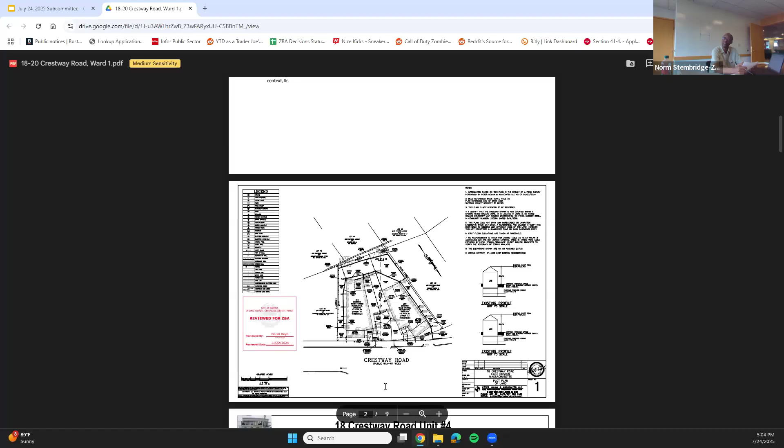Thank you, Madam Chair. For the hearing scheduled for 5 p.m. today, the first case we have is case BOA 1674561 with the address of 18 to 20 Crestway Road. If the applicant and or their representative are present, will they please explain to the board?

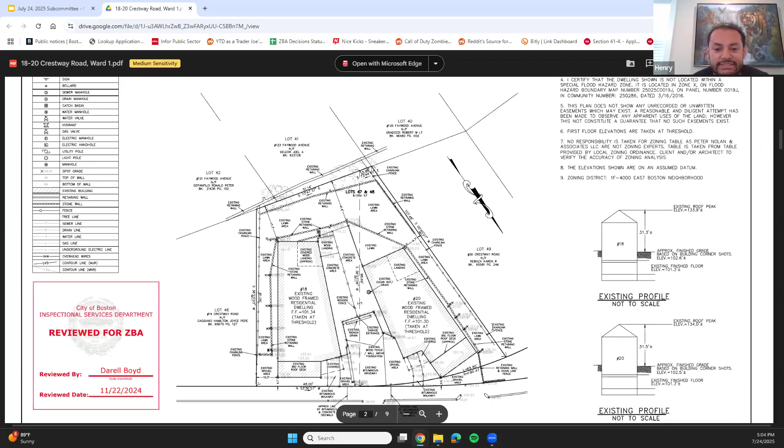Hi all, can you guys hear me okay? Yes, sir. Oh, thank you. So yes, my name is Henry Sanchez. This is my proposal. I currently live at 18-20 Crestway Road, Unit 4.

So it's the left-hand sided building that you see on the screen here. It's a two-building condominium homeowners association. There's 2 units in my building, again, the 18 side, 3 units on the number 20 side. And really our project is just looking to get more outdoor space. There really is no common area that's accessible or belongs to us. The middle kind of area that you see between the 2 buildings is a courtyard area that is exclusive use for units 2 and units 1, which are the lower level units on each of the buildings.

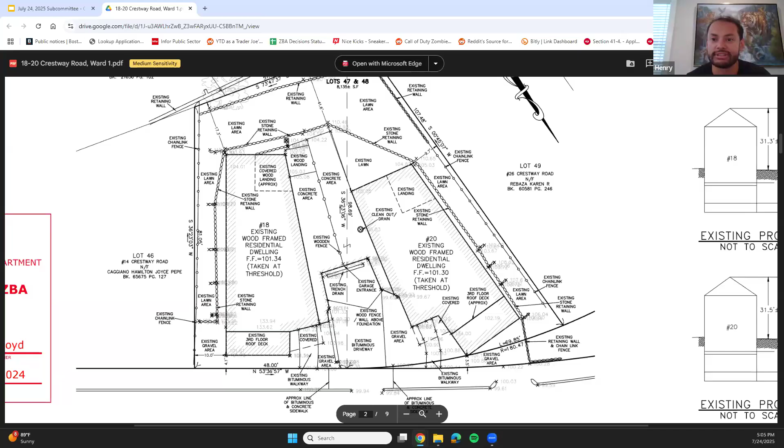Our unit is on the 2nd and 3rd floor of the left-hand building, and like I said, there's no common area. There's no kind of backyard. It's just kind of a high ground existing retaining wall with some trees in the back. So we're just looking to get a little bit more sunlight, enjoy the outdoor space in the couple of months that we do have here in the Northeast. And again, it's just my wife, myself, and my son here that live with us.

Not a lot of people are going to be using it up there. At the moment, the design we're going for is to follow the overall shape of the building, so not exactly square, but it's about 800 square feet. The plan would be to have a see-through pergola up there just to let a little bit of sunlight through, not looking to block sunlight for any of the neighbors or anybody else around. But I think that's it in a nutshell.

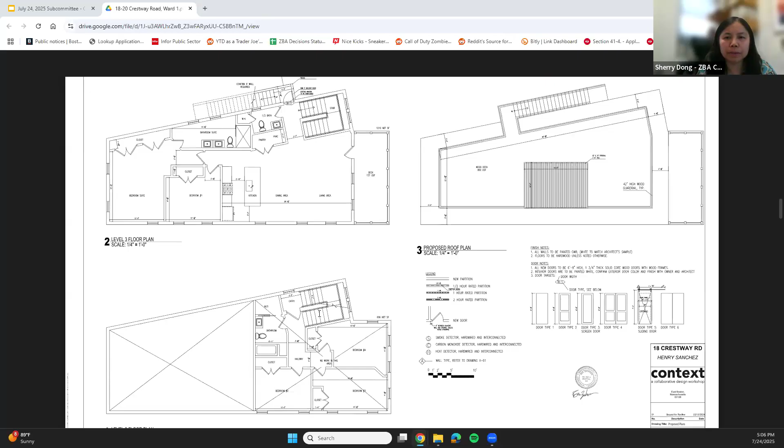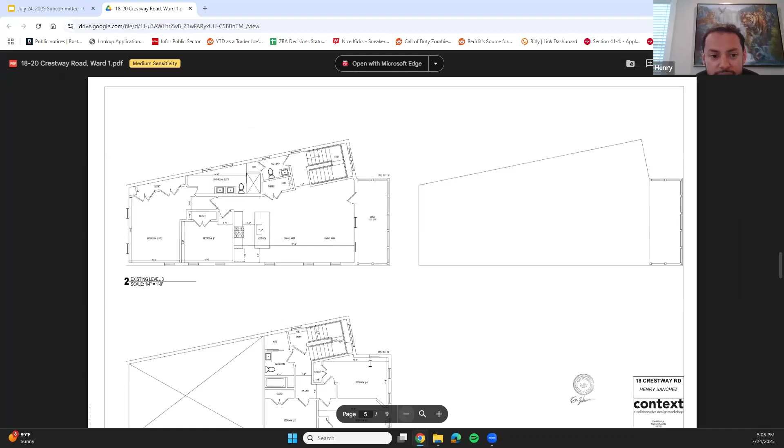Can you confirm how far the deck is set back on the front side? Yeah, I believe, and I'll invite Eric who helped me with the plans, but I think it's about 10 feet, if we scroll up a page. To the prior page, maybe one more. Yeah, this one here, on the top right. So it's about, I can't see that exactly. Is it maybe...

So it's about 7.5 feet from the exterior of the building. However, the square rectangle that you see on the right is the front balcony that we have, and that's where the building exterior runs to. Are there questions from the board?

No, there's no questions. It's good that you asked regarding the setback, because I see that the Boston Planning is recommending that the deck be set back at least 5 feet from the edge. Do you see that being a problem? And maybe this is more to your architect, Eric.

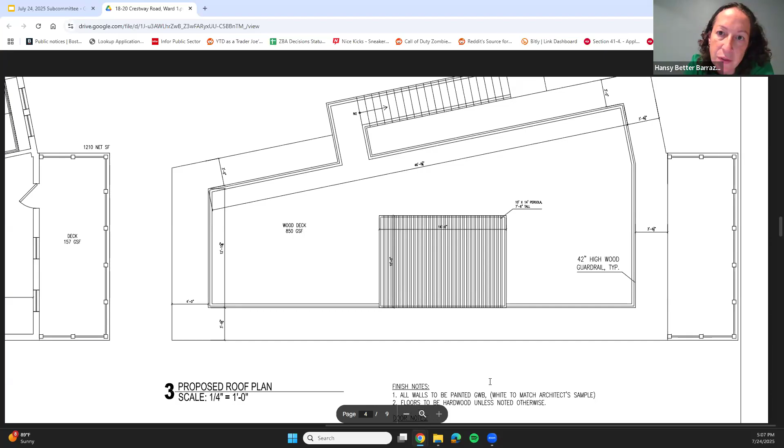Thank you, Hansy. This is Eric Dackerson, architect for the project. No, I don't think that would be an issue at all, being set back 5 feet from the edges of the roof, except for in the area right around the staircase.

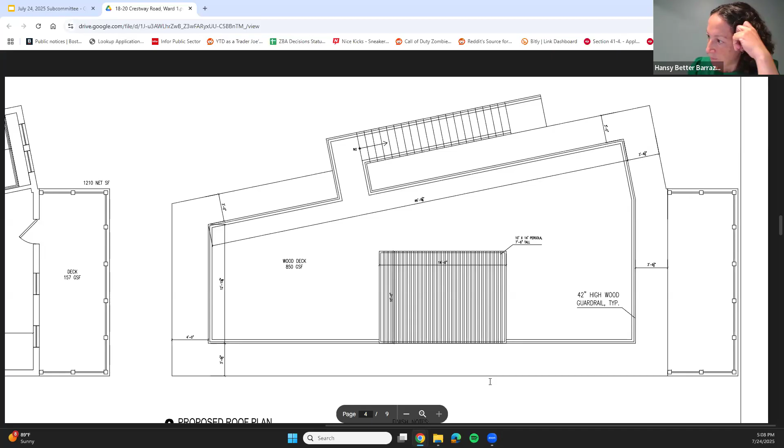Okay, great. And then they're also recommending that the pergola be removed. Do you see an issue with that as well? No, that'll be fine. We could look at some alternative kind of shape, maybe an umbrella, but no permanent structure. We can think that over. Yeah, that's usually, and as you know...

Typically, they're recommending that you access the roof deck through an internal stair versus an exterior one. And I do see that there is a possibility to have an internal stair for private access, and you can either do a roof hatch or an access like a headhouse access.

Yeah, we definitely contemplated that initially. The challenge is the level below — the stair would either eat up a big significant portion of the living room or the kitchen. So we were hoping to extend up from the stair, as is shown on the exterior. But I guess the answer is up to the owner; that is the reason we chose to try and do a stair along the side of the building instead.

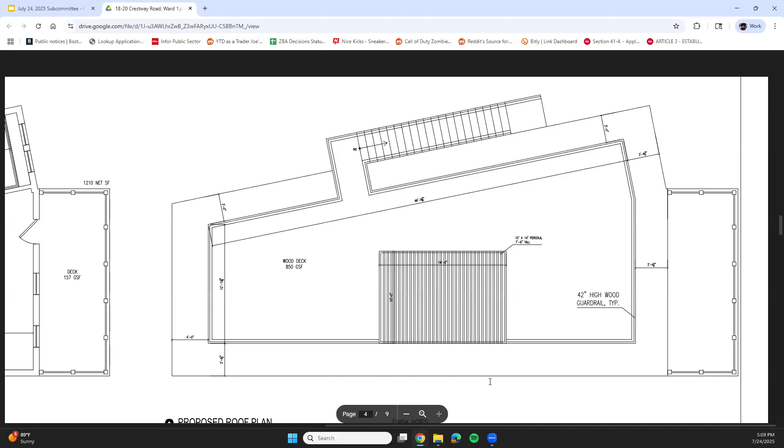It looks like you have a vertical core. It looks like you can tie into that potentially, and maybe you will need to move the location of the roof deck for that to work, so it doesn't eat up half of your living space. But I think these things can be worked out. So, Madam Chair, I don't have any further questions or clarifications.

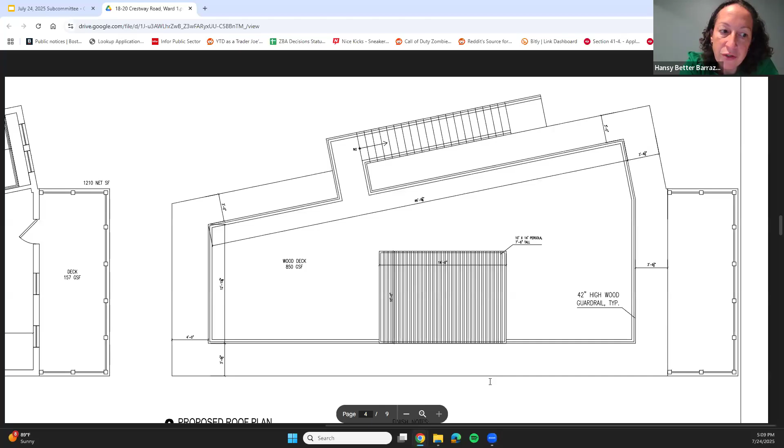Sounds good. With that, may I have public testimony? We don't have any hands raised right now.

Okay, Madam Chair, members of the board, Connor Newman with the Mayor's Office of Neighborhood Services. At this time, the Mayor's Office can defer to the judgment of this board. ONS ran an abutters meeting on April 9th, a long time ago. The applicant was able to answer questions that residents had. They went on to connect with the Orient Heights Civic Association. Presently, we're unaware of any concerns at this time. With that, we'll defer to the board.

Thank you. With that, may I have a motion? Yes, Madam Chair, I'd like to put forward a motion of approval with 3 provisos: one, that the pergola be removed; second, that the roof deck be set back 5 feet from the edge; and lastly, that the architect works with BPD in the design of an internal stair to provide access either through a roof hatch or a head house.

Is there a second? Second. Mr. Stenbridge, yes. Ms. Better Barraza, yes. Chair votes yes, the motion carries. Good luck, sir. Thank you.

Next, we have case BOA 1728524 with the address of 389 Maverick Street. If the applicant and/or their representative are present, would they please explain to the board?

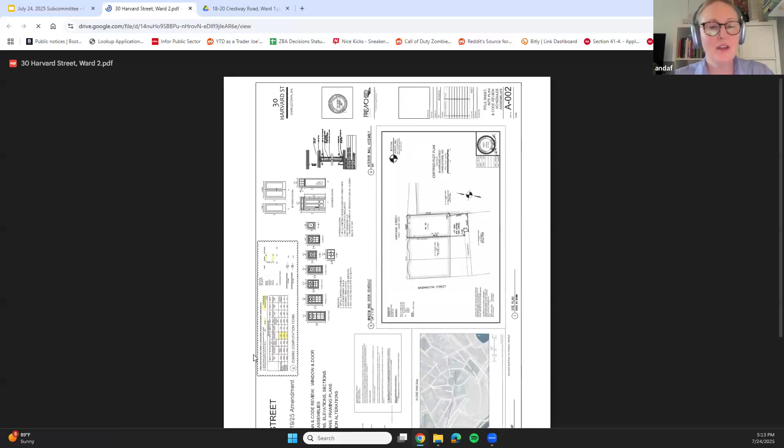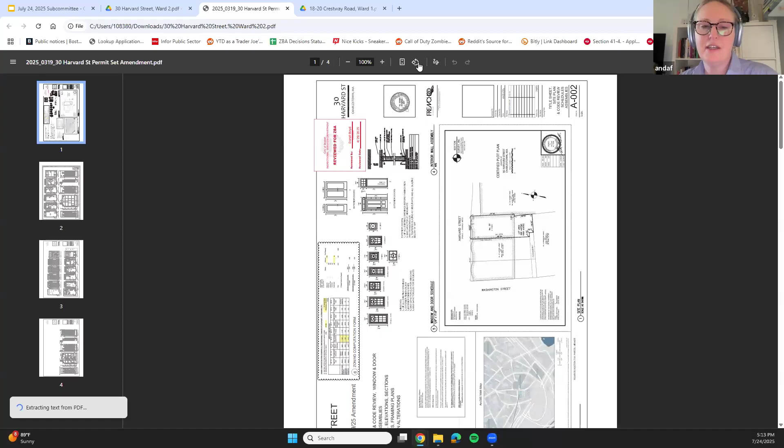Yes, hello. My name is Anna French from French 2D Architects in Charlestown. This is a 3.5-story brick row house in Charlestown on Harvard Street. The project is a single family home currently being renovated. The variances we're seeking are around the extension of a dormer, widening a dormer at the rear, and using the basement as living space.

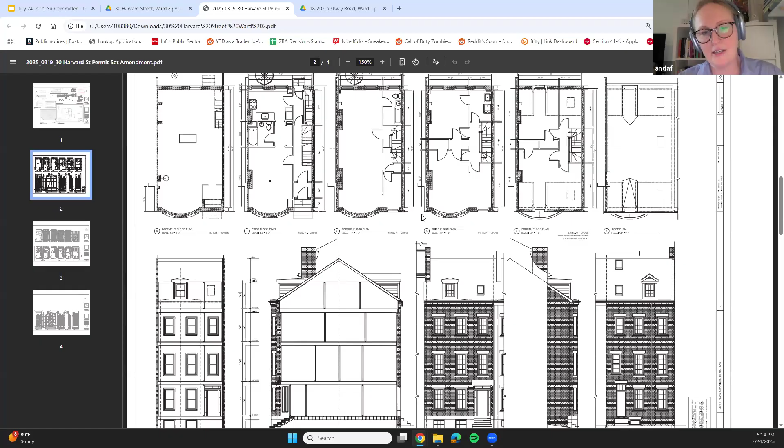We met previously with both Alexa Pinard of the Planning Department and Shelley Blanchard of the Landmarks Commission. Both saw no problem with the addition of the dormer. It does not sit on a public way. What you're seeing here is the existing condition, with the front elevation on the left and the rear elevation on the right. If you go to the next slide, you'll see the proposed change.

There we go. You'll see that the front has not changed, that it's the restoring of the exact dormer that already exists. At the rear, we've taken the existing dormer and repeated it three times to create that larger dormer, but set back the form between so that it is not one large shed, but instead varied. The neighbors have been very excited about this. If there are any other questions I can answer, we did have some supplemental photographs if that helps.

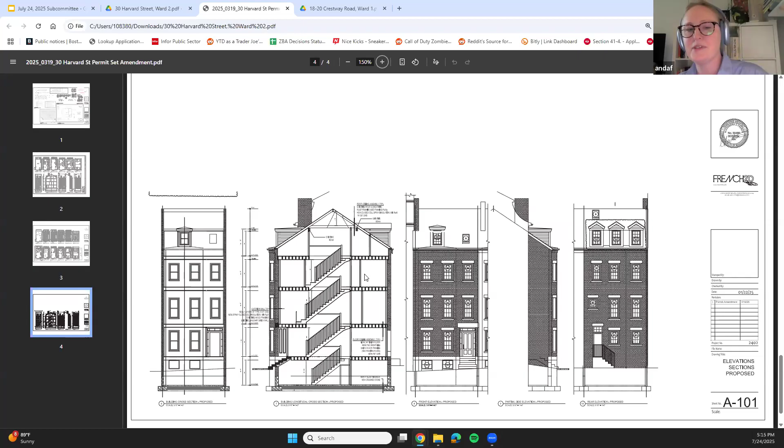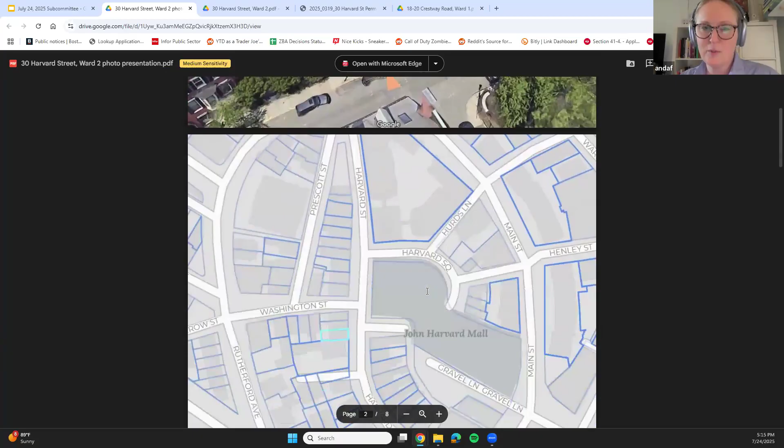The general condition here on Harvard Street is that all of the front-facing houses have maintained their historic character and existing dormers. If you look at the images showing the rear, this is very characteristic of many of the houses in the row, where you'll see this kind of shift happening. In the next slide or two, we outline it, and you can see the variation that has happened over time on slides 6 and 7.

Great. Are there questions from the board? Yes, if you can just go to the slide showing the front view where you can see the front windows. Of the frontal view, yeah, that one. This one, perfect, right here.

Can you just describe what use you're doing in the basement? Are you going to do a habitable room, or is it just storage? What's the function of the basement use? Yes, of course. It's essentially a family room and a laundry room.

I'm picking up feedback. It's the addition of a family room, a laundry room, and a bathroom. Okay, so it's not going to be a habitable bedroom? No, no, no bedroom, absolutely not.

I don't have any further questions. I was just kind of concerned with the window locations and not having an egress, but it's fine. No further questions. Thank you.

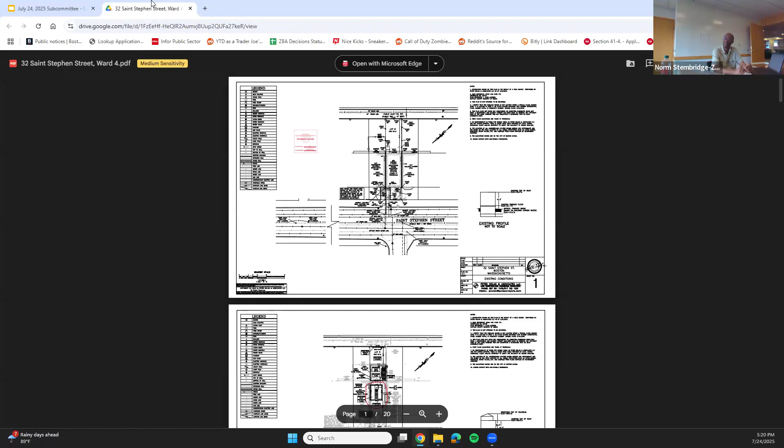Thank you very much, Madam Chair, members of the board. Cameron Merrill on behalf of Kyle Holden and David Bedrin, the applicants. What you have here is a head house not connected to a roof deck. This is for access from this renovated brownstone. It's been about a year and a half or so of renovations, and this is the final step. They need safe and easy access to get to the roof, and this was the proposal they thought would be appropriate for this location. It will be complemented by a skylight in the roof as well, which will brighten up the top floor of their home and provide access to the roof, which currently does not have interior access as needed.

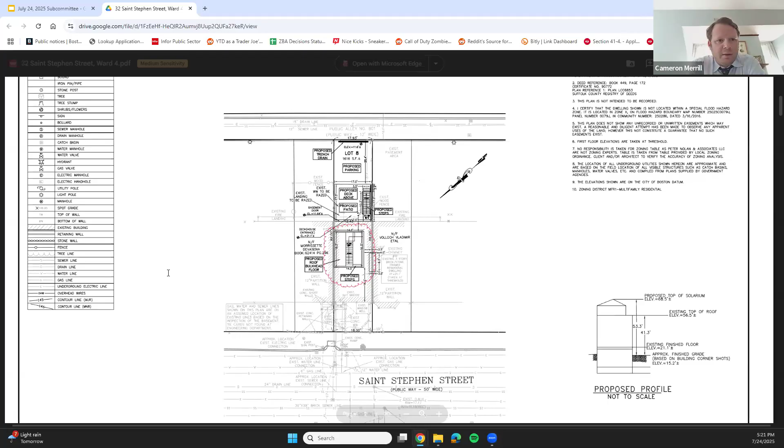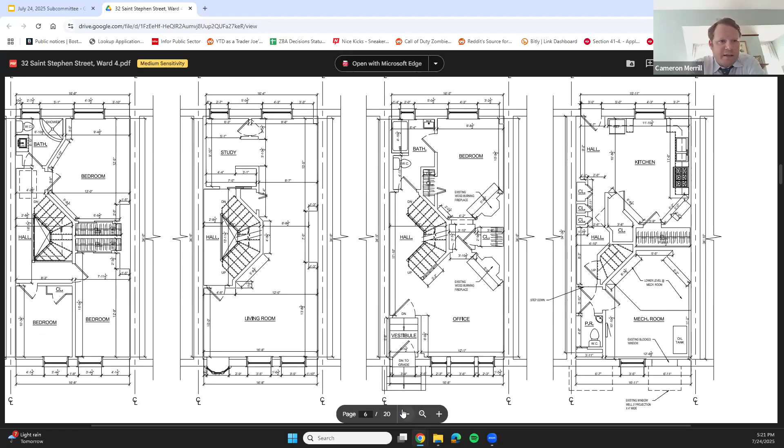We respect the planning decision to recommend this go to ONS and to the BPDA for design review, and we appreciate the comments they made in support of this project. Ultimately, we think this is a good fit for the neighborhood. It is set back from the roof, and the neighbor does have roof structures as well, so it's not uncommon in the neighborhood, and there will be little impact on the abutters. This does not block any views or shed any shadows or impact the abutters as called out for by the relevant condition in the zoning code. Ultimately, it's under the allowable height, but because of that one provision, we are here for this conditional permit.

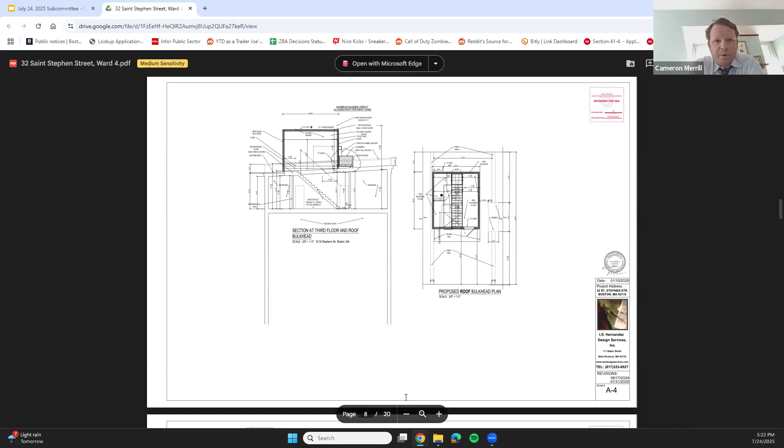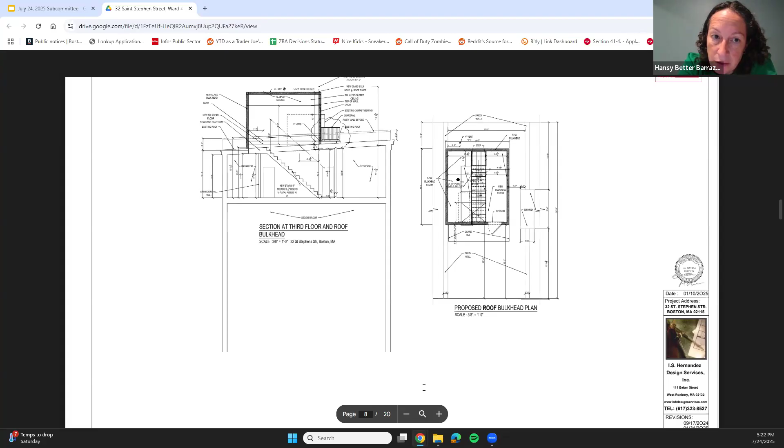Any questions from the board? It's interesting that it's being called a bulkhead, and in the description it says install a greenhouse on the rooftop. It does look like an additional structure, like a greenhouse. I'm going to make a recommendation that we defer this to the full board.

It is called a bulkhead, a greenhouse. I think there's a place where it's identified as a solarium. I don't think there was any intention behind what it was called in the engineer's reports. They do refer to it that way, but it is a structure on the roof. Okay, I don't have any further questions.

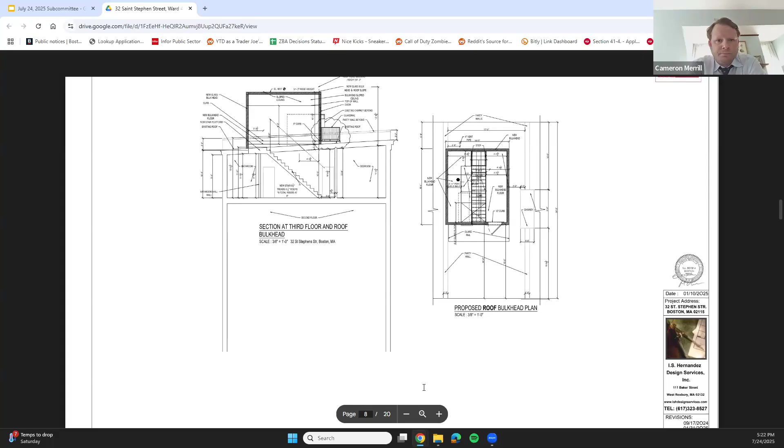Thank you. Well, we'll just take public testimony and we can go to the motion. Madam Chair and board members, Siggy Johnson with the Mayor's Office of Neighborhood Services. This petitioner completed the ONS community process. Our office hosted an abutters meeting on May 28th, at which multiple abutters were supportive. The Fenway Civic Association is in support. Our office is unaware of any concerns with the proposal. With that background, we defer to the board for their judgment.

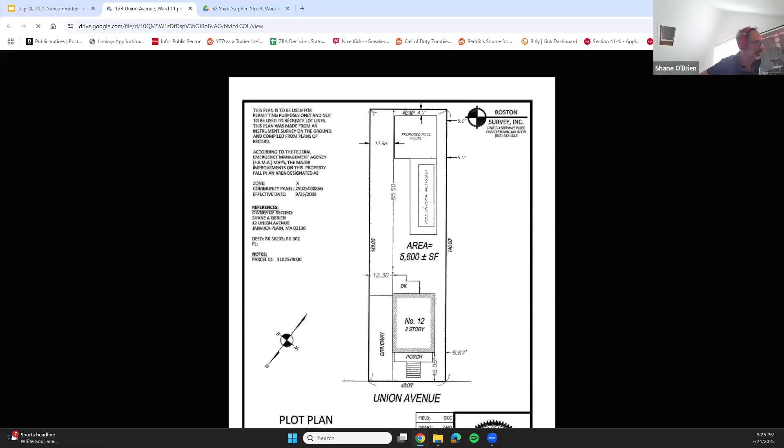My name is Shane O'Brien, I'm the owner applicant. The application is to add an ADU in my backyard. I'm calling it a pool house, but it's essentially an ADU, a two-story unit at the back of the lot. It's two-story, flat roof, about 800 square feet. The first floor mostly will be storage, and then stairs to the second floor, which is essentially a one-room studio. That's connected to my apartment. It's not going to be a third unit on my property, it's basically an extra space for me.

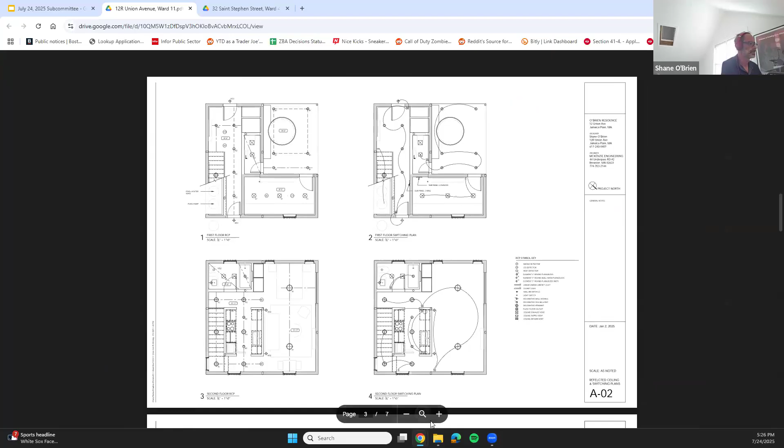What else? So can you just give us a sense of those violations listed? How much are you exacerbating them? Like rear yard insufficient, side yard insufficient, height excessive, et cetera. Can you just, you know?

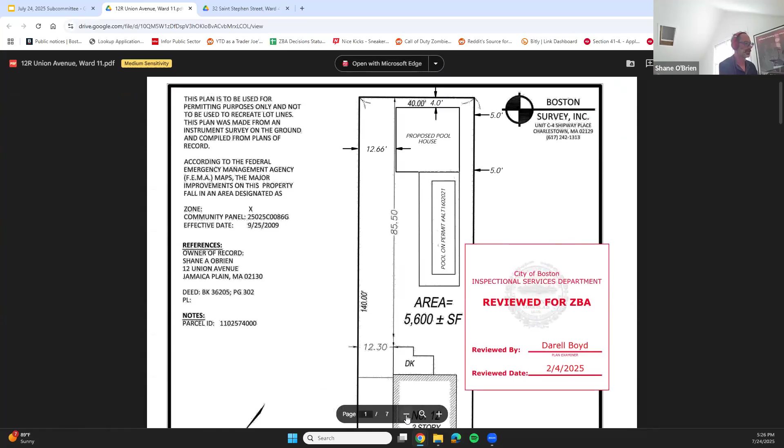So height is because 15 feet is the max for an ADU, so I'm at 20 feet, 5 feet over the allowable height for an ADU. The side yard allowable is 10 feet, so I'm at 5 feet from the side yard. That 5 foot, that's a fence, and beyond that fence is a parking lot, essentially a 10-car parking lot, so it's a pretty open space. The rear yard is 4 feet from the rear lot line, and the allowable is 10 feet, so I'm obviously way over that. The property beyond that 4 feet is 3 feet - it's essentially a 21-foot cinder block warehouse that's 3 feet from their property line. So I thought I was being as considerate as I could be, I guess. I was trying to keep it away from the left-hand lot line because there is a neighbor there that's pretty close.

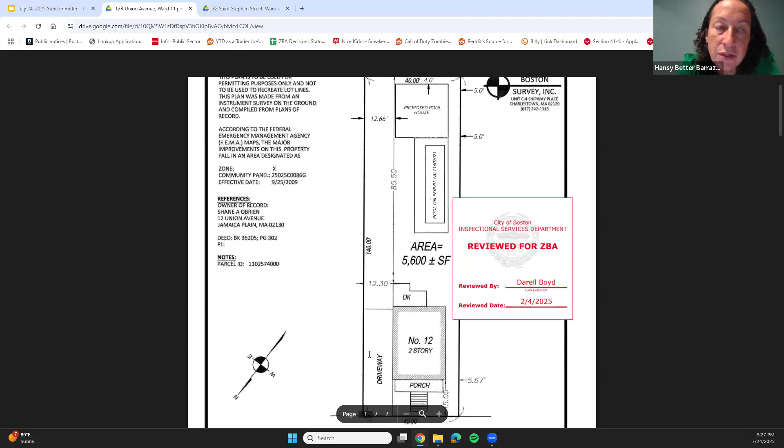Thank you. Are there other questions from the board? Again, I find this subcommittee is to really review small alterations, small projects. When I see a project that's an additional unit, when I see a project with at least 5 or 6 violations, especially one that has to do with not having 2 or more dwellings on a lot, I see that those projects should go in front of a full board. So I'm going to make that recommendation again, because with the full board, I can ask specific questions to BPDA, because I don't think they're online right now, are they?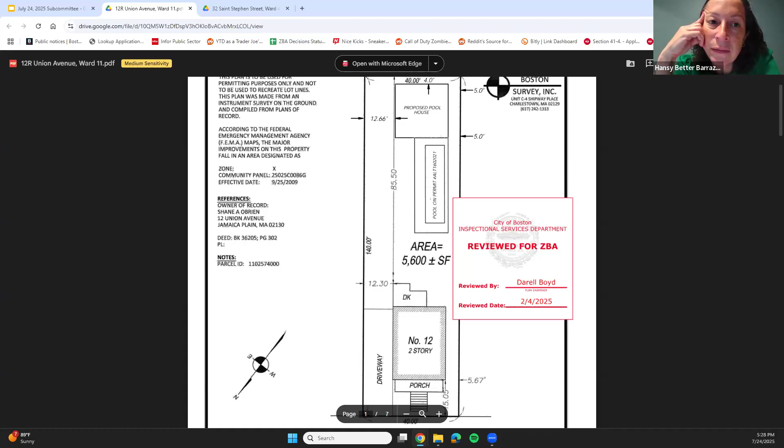Secretary, can you tell us if Jeff Hampton is on, or anyone from BPD? I don't see anybody. I think I would like to give an opportunity for neighbors and abutters to be fully notified, and it's just better due diligence on a project of this scale. So I'm going to make the recommendation that this goes in front of a full board.

We have a full hearing next week, Ms. Better Barraza, but that is fine. Let's take public testimony.

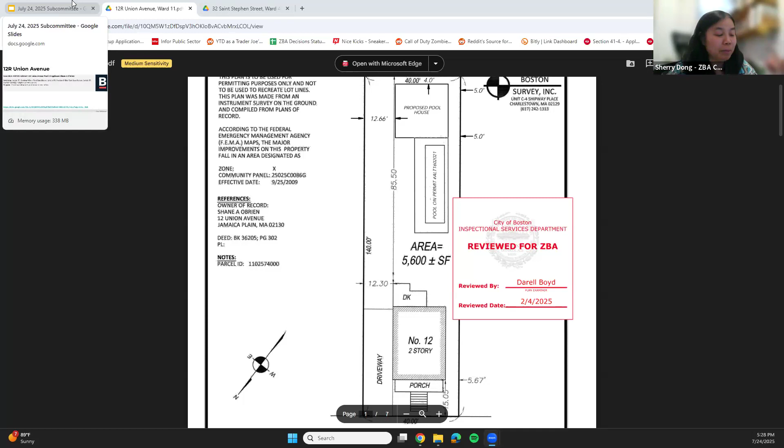Yes, Madam Chair, members of the board, Conor Newman with the Mayor's Office of Neighborhood Services. At this time, the Mayor's Office will defer to the judgment of this board. Some background: ONS ran an abutters meeting on April 17th. Only 2 abutters were in attendance. One voiced concerns over the lot size and setbacks and suggested the applicant adjust their plans. The other abutter voiced support, stating it will not affect an adjacent property. The proposal then went to the Jamaica Plain Zoning Neighborhood Council, which voted to support it. At this time, our office has not received any further community feedback. We defer to the board. Thank you.

Madam Chair, we don't have any additional comments. Okay, with that, may I have a motion?

Madam Chair, I'd like to put forward a motion to defer this to the next hearing where there's a full board in front of us. Is there a second? Second. Mr. Stembridge, yes. Ms. Better Barraza, yes. Chair votes yes, the motion carries.

And that's for Tuesday, July 29th. Thank you, so this coming Tuesday, come back. Yes, sir. And can I ask, is the concern that it's because it's adding a unit to my yard, or?

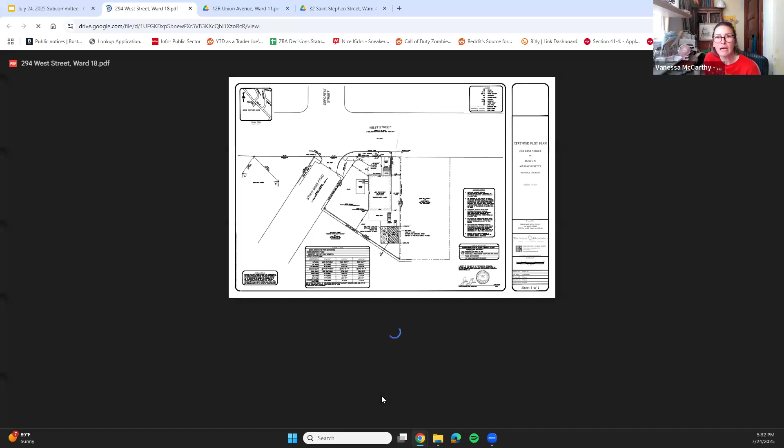Hello, my name is Vanessa McCarthy. I'm from Plas Design, and I am representing the homeowners. One of the homeowners is on the call as well.

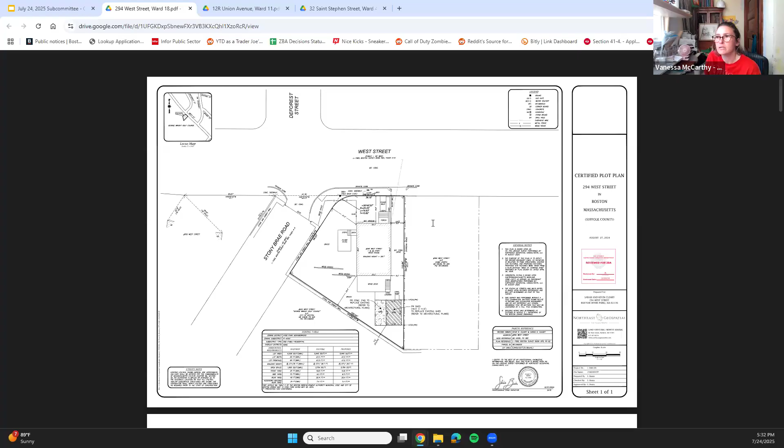Our project is an existing non-conforming structure. It's currently a shed that is set back about 75 feet from the property line, close to the back of the yard. Like I said, it's existing non-conforming. The current structure is about 1.7 feet from the side property line, and it has fallen into disrepair over the years and is no longer usable. The homeowners would like to tear it down and rebuild on the same footprint.

We've made every effort to have minimal impact on the neighborhood and make sure that it matches the design aesthetic of the neighborhood. And we are here because we have 3 violations.

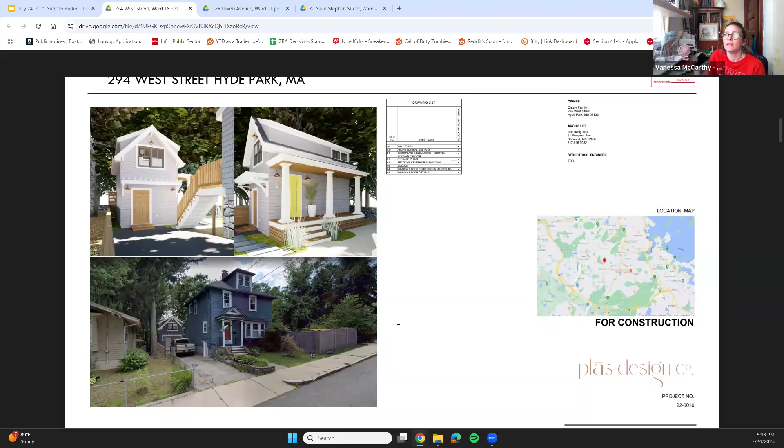I am contesting those violations because after reading through the zoning more thoroughly, the first violation was the side yard setback. As I mentioned, it's existing non-conforming, which according to the bylaws, Article 69, Section 31, allows an existing building, existing on the effective date of the article and not conforming to the applicable dimensional requirements, to nevertheless be altered or enlarged, provided such nonconformity is not increased and any enlargement itself conforms to such dimensional requirements. Our structure is being built on the same footprint, so we are not enlarging it or increasing any nonconformity. So we don't feel we are violating this bylaw.

The second violation was excessive building height. The zoning bylaws state a maximum height of 15 feet. Again, when I looked into the definitions to understand how building height is measured, our shed structure actually falls under a separate definition of building height because it's not abutting a street.

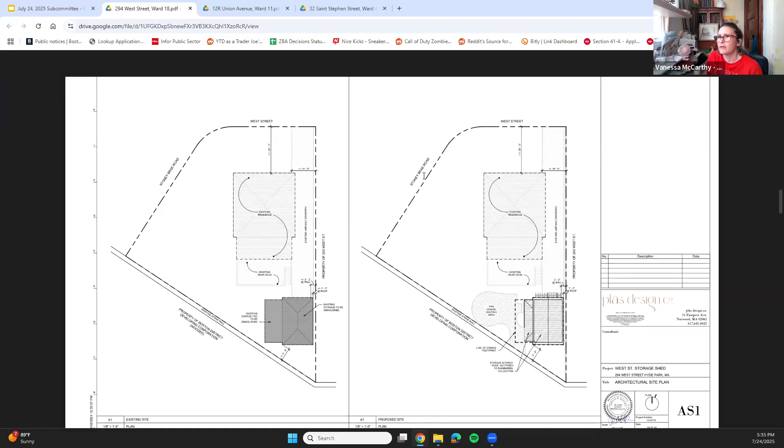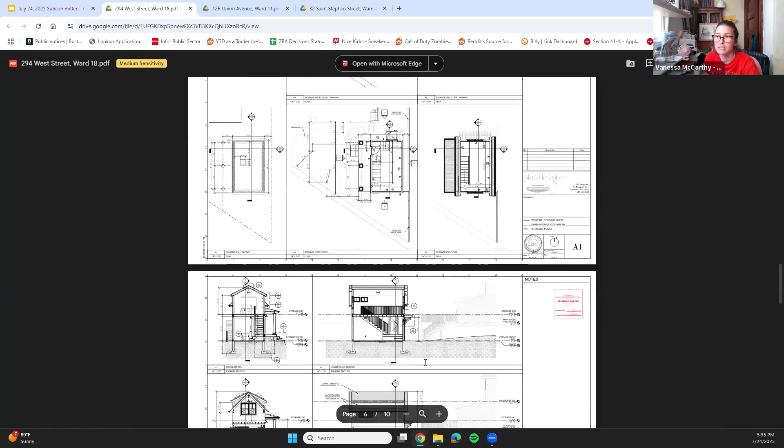The building height by definition is the vertical distance from the grade to the mean level of the roof slope. However, our building is not abutting a street, and is measured from a grade line 20 feet away from the grade at the building line, which actually increases our height by 1.3 feet above the grade at the building footprint. By these definitions, our building height is actually 15 feet, so we're not violating any zoning bylaws.

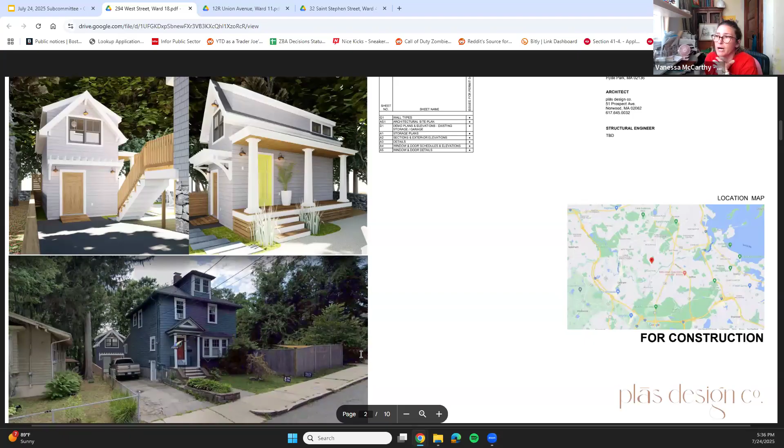The third violation notes that an 8-foot setback is required between structures, and it cites Article 69, Section 30.7. But in that section, there was no mention of this requirement, and I couldn't find it within any of the bylaws in the entire ordinance. There was a mention of 2 or more dwellings and a distance between them, but this is not a dwelling—there is no plumbing, it's not habitable. So I feel this one is not appropriate at all to our building and the zoning.

I think that concludes the violations that we've had and how we feel about the results. Thank you. Are there questions from the board?

What's the use of the second story? And you said it's 17 feet 7 in height? It depends on where you're measuring it from. The overall building height, I can pull that up. The use is all storage.

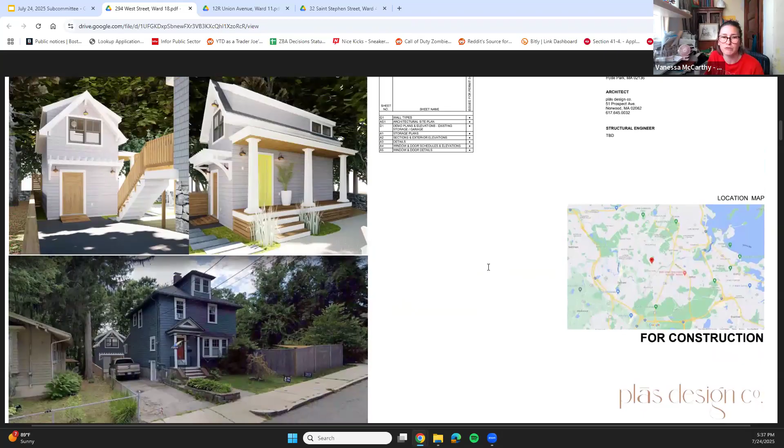The first floor is, there are 2 floors, very short levels. The first floor is mostly for outdoor storage. The second floor is for overflow from the house storage. So it's really just made to look nice, but it's really just a glorified storage shed. And the existing shed was also used for storage? Correct, yes. Okay, all right, I don't have any further questions. Thank you.

May I have public testimony? Yes, Madam Chair, members of the board, Conor Newman with the Mayor's Office of Neighborhood Services.

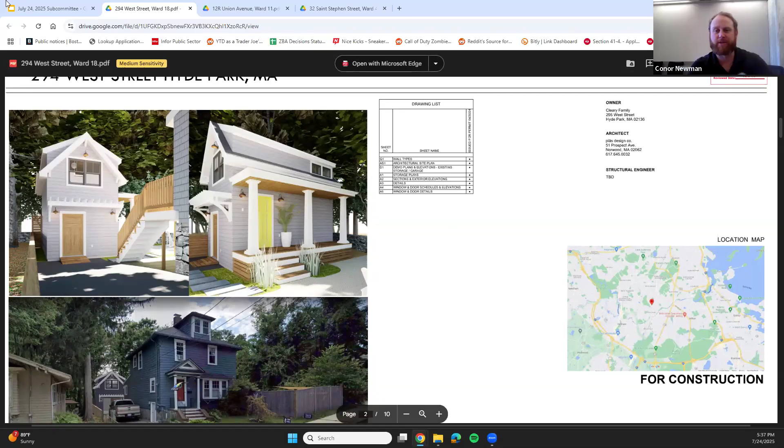At this time, the Mayor's Office will defer to the judgment of this board. Some background on the community process: ONS hosted an abutters meeting on April 1st that was lightly attended. Abutters present asked questions regarding the construction time frame as well as the height of the proposed shed. The applicant was able to address those questions. The proposal then went on to meet with the Hyde Park Central River Neighborhood Group, who voted to support the proposal. To this date, our office received one letter of support from the HPCR, which said they were in favor of increasing the appeal of the property.

With that, we'll defer to the board. Thank you, Madam Chair, there are no additional comments. With that, may I have a motion?

Madam Chair, I'd like to put forward a motion of approval. It's really an expansion of an existing non-conforming accessory use. I don't see any issues with it. Is there a second? Second. Mr. Stembridge, yes. Ms. Better Brazza, yes. Chair votes yes, the motion carries.

Good luck. Thank you. Thank you.

Next, we have case BOA 1700082 with the address of 34 Bradeen Street. If the applicant and/or their representative are present, will they please explain to the board?

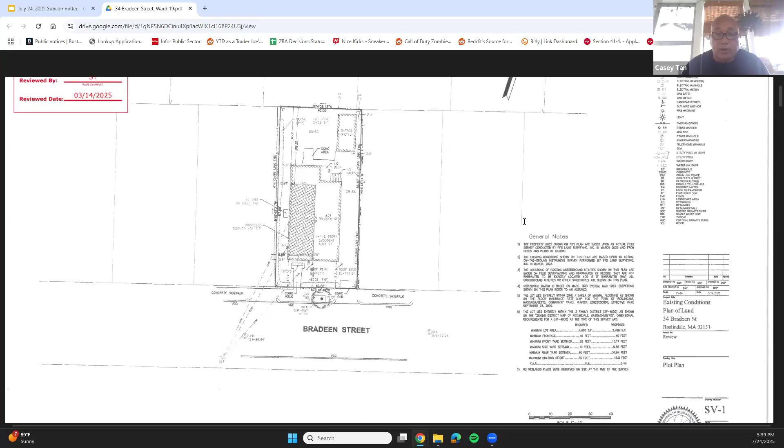Our project is pretty much raising one side of the roof from gable to a dormer and just creating more storage space upstairs. Again, we're not touching the footprint, we're not going outside the footprint of the existing home. It's just a shed dormer we're adding to one side of the second floor.

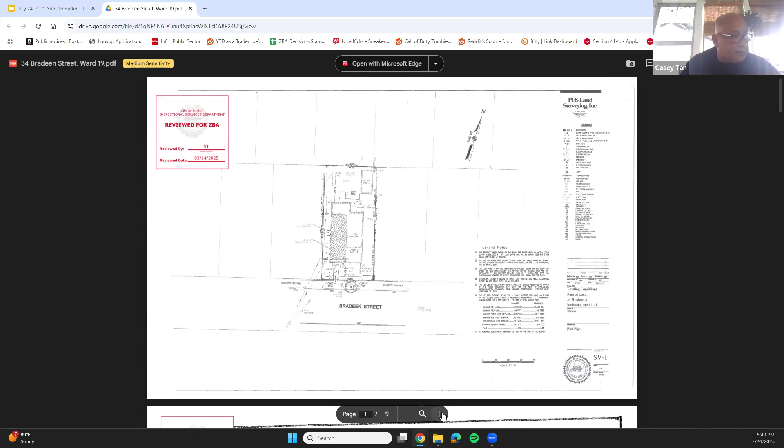How much square footage does that add? Yeah, it's up to about 400, a little over 400 square feet. I have a thing here to be exact. Thank you. Questions from the board?

May I have public testimony? Yes, Madam Chair, members of the board, Conor Newman with the Mayor's Office of Neighborhood Services. At this time, the Mayor's Office will defer to the judgment of this board.

Some background on the community process: ONS had the applicant circulate flyers to abutters within 300 feet. We did not receive any feedback from those abutters. There's also no active civic association in this area, so that concluded the community process. We're unaware of any concerns. With that, we'll defer to the board.

Thank you. Madam Chair, there are no additional comments. Thank you. With that, may I have a motion?

Madam Chair, I'd like to put forward a motion of approval. Is there a second? Second. Mr. Stembridge, yes. Ms. Better Brazza, yes. Chair votes yes, the motion carries.

Good luck, sir. Thank you. Thank you. Have a good night. You too. Bye-bye.

Next, we have case BOA 1703635 with the address of 9 Cutter Road. If the applicant and/or their representative are present, will they please explain to the board?

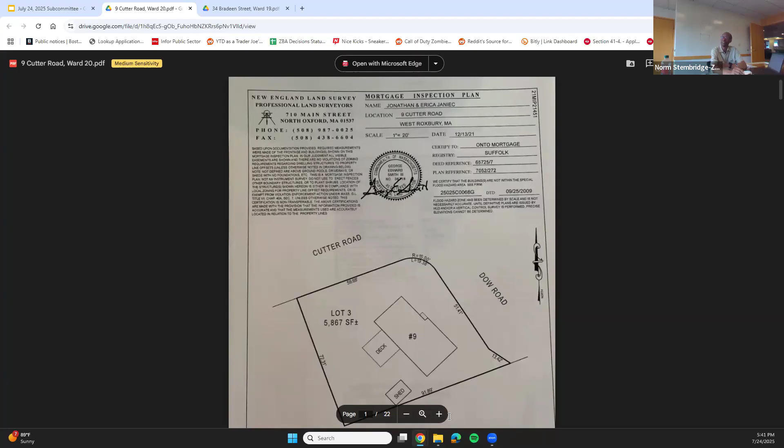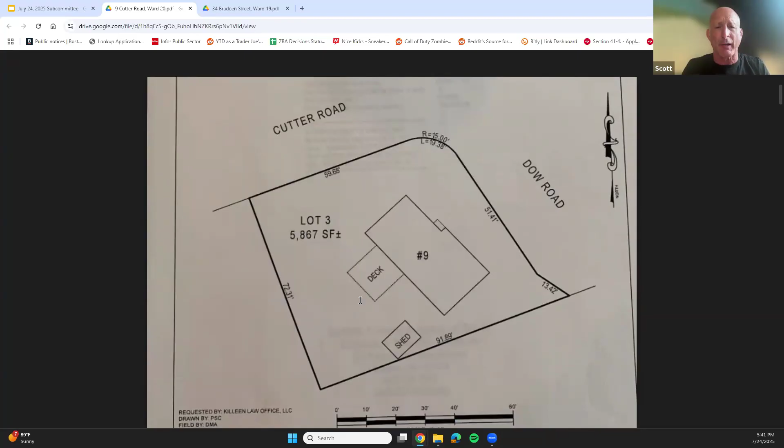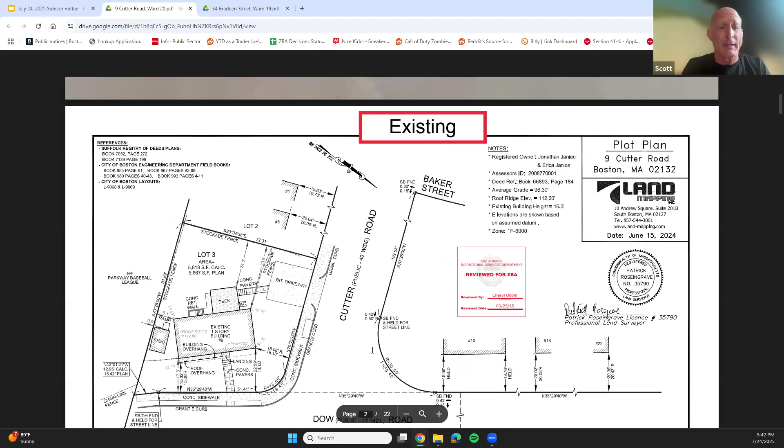What we're simply doing for John and Erica and their children - he's a Boston firefighter - is to increase the size of their very modest home by adding a second floor. The existing house does not conform to the required setbacks.

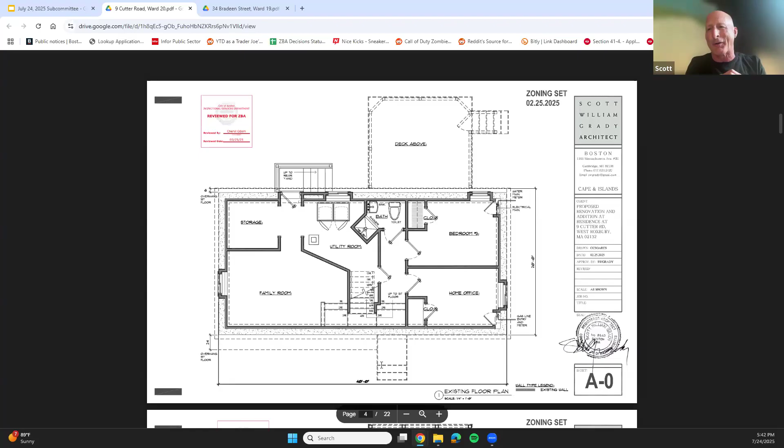We would not be increasing the nonconformity by adding the second floor, with one caveat. We are looking to gain a little extra square footage by cantilevering the rear elevation into the rear yard, which mostly conforms except for 2 little corners shown on the site plan. For the integrity and aesthetics of the house, we'd like those 2 corners to have the full rectangle for that second floor. It really is as simple as that, and I'm available for any questions.

Thank you. Questions from the board? May I have public testimony?

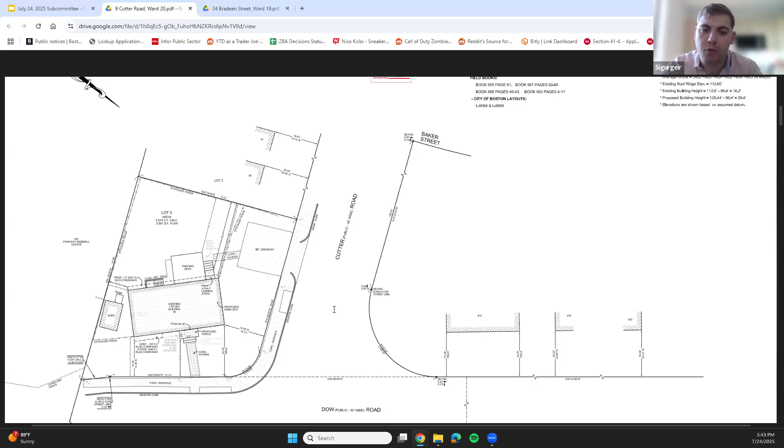Madam Chair and board members, Siggy Johnson with the Mayor's Office of Neighborhood Services. This petitioner completed the ONS community process. Our office hosted an abutters meeting on May 6th at which no concerns were raised. The West Roxbury Neighborhood Council is in support of this application. With that background, our office defers to the judgment of the board.

Thank you. Madam Chair, we don't have additional comments. With that, may I have a motion?

Madam Chair, I'd like to put forward a motion. I second it. Chair votes yes, the motion carries.

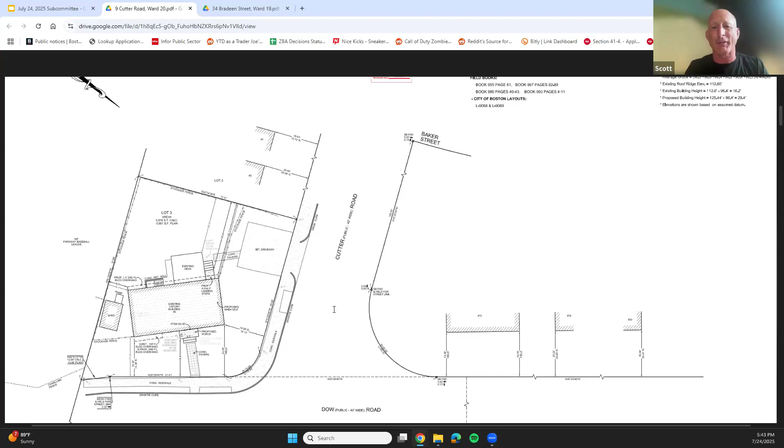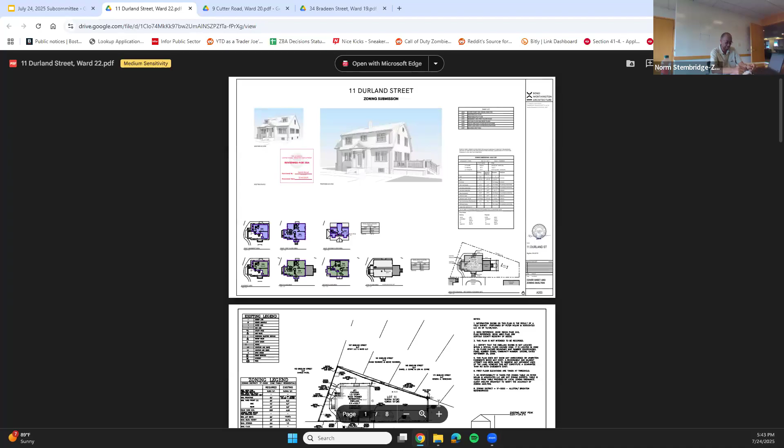And next we have case BOA 1699328 with the address of 11 Durland Street. If the applicant and/or their representative are present, would they please explain?

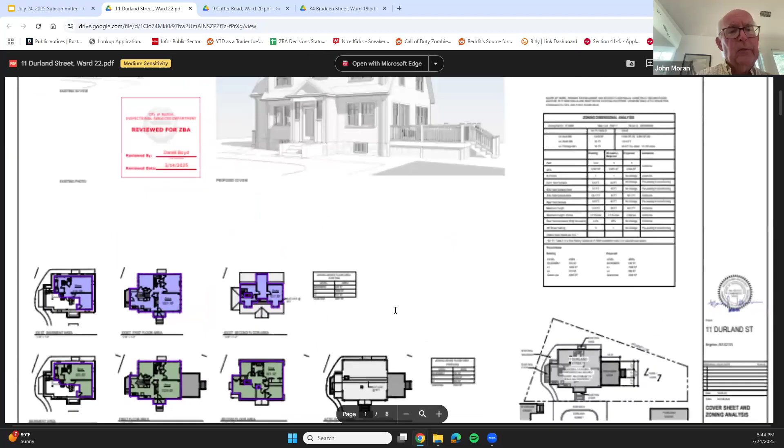Madam Chair, members of the board, John Moran, Alpine Advisory Services, mailing address 130 Beach Road, Orleans, Mass. This is a single-family home which was constructed in 1939. As the board is aware, the Boston zoning code was enacted several years later in 1956.

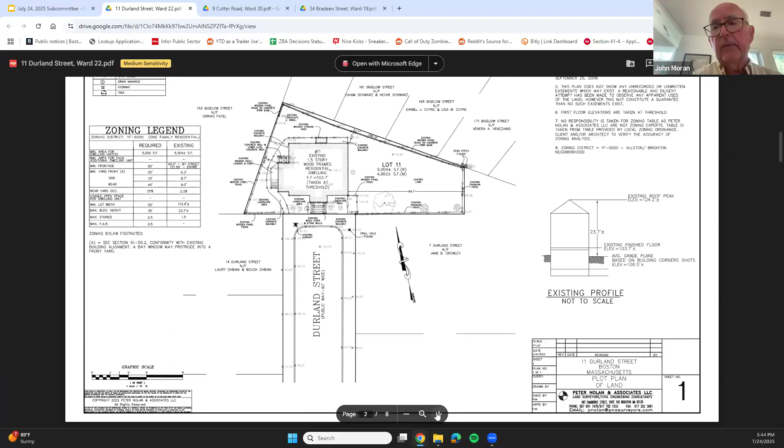The project is cited for front and rear yard insufficiency. The site plan shows that the front yard setback to the covered entryway is 6.3 feet, and the rear setback is 9 feet. The current code requires a front yard setback of 20 feet and a rear yard setback of 40 feet. Again, this is a pre-existing legal non-conforming setback.

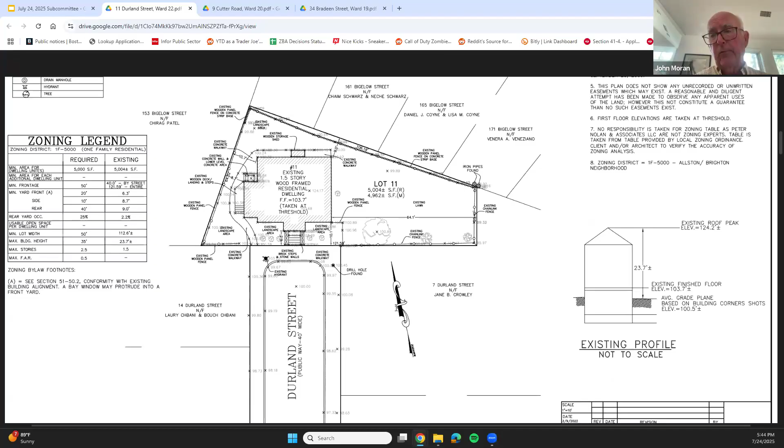The proposal, shown on the next site plan, shows a full dormer replacing the existing front and rear partial dormers, plus an addition of a deck, which does not require any zoning relief. It is the front and rear setbacks that require relief.

The full dormers would create additional living space for the growing family - 3 bedrooms plus an office. For further detail on the plans, if the board wishes, I would ask the architect to review the plans with the board. Norm, are you available?

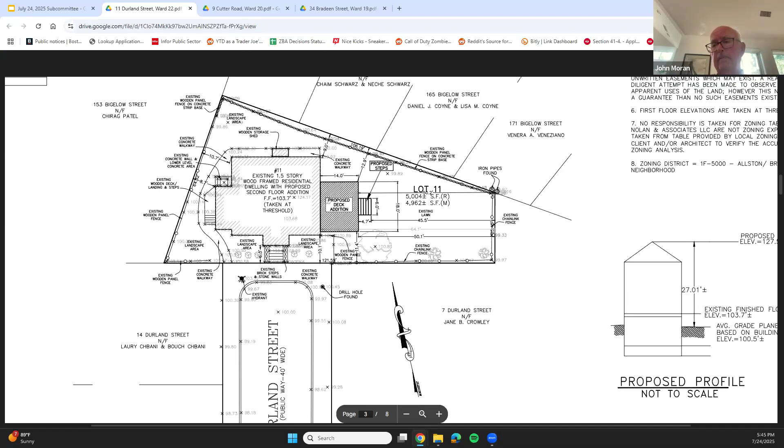Let me start with, are there questions from the board? Hearing none, I'm going to go to public testimony.

Madam Chair and board members, Siggy Johnson with the Mayor's Office of Neighborhood Services. This petitioner completed the ONS community process. Our office hosted an abutters meeting on May 14th with 4 abutters in support and no concerns raised. The Brighton Allston Improvement Association, the active civic group in this area, is in support of the application. With that background, our office defers to the judgment of the board.

Madam Chair, if I may add that there was enthusiastic support by the neighbors, plus Councillor Brennan has submitted a letter to the chair in support of the requested relief. Again, there is no enlargement of the existing legal non-conforming setbacks.

Any other raised hands? No, Madam Chair, we don't have any additional comments. Thank you. With that, may I have a motion?

Madam Chair, I'd like to put forward a motion of approval. Is there a second? Second. Mr. Stembridge, yes. Ms. Bedrosian, yes. Chair votes yes, the motion carries.